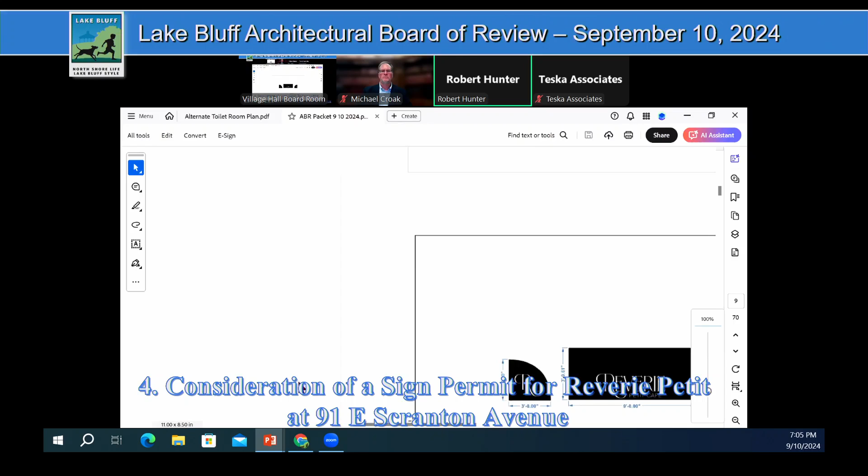There we go, there's our awning drawing. Art, do you want to kick it off? You know, I really had no comment. I just walked by and the existing awning appears to be removed. Yeah, they take it down and clean it, and then they wait for approval before the fabric gets applied to the existing frame. Exactly, correct. Yeah, I have no real comment whatsoever. I mean, it looks fine to me.

It complies with all of the requirements of the ordinance. Right. I agree, it looks fine to me. I think it looks great, and I like the chairs. Okay, good. I think it looks great. Bob Hunter, did you have any comments on the awning? I think it looks good.

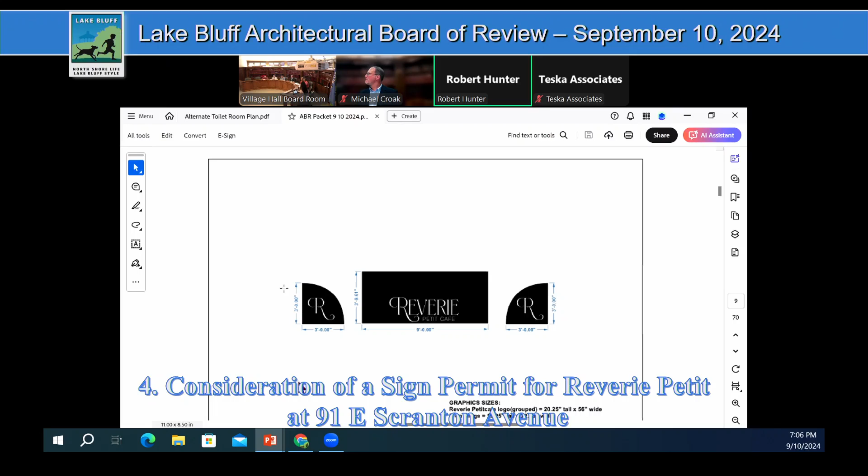Can you hear me? Do you want to ask us to make a motion? Yes, we heard you, thanks. Okay, can we have a motion then? I move the sign be approved as submitted. Second. Okay, Scott seconded, we'll do a roll call vote. Member Cottrell, aye. Member Dahlman, aye. Member Wicks, aye. Member Stratoff, aye. Member Hunter, aye. And Chair Deegan, aye. Okay, the motion passes, the sign's approved, the awning's approved. Thank you all. Thank you.

Okay, item number 5, moving on to design review for a sculpture and landscaping at the train station, 600 North Sheridan. So we have Jody Mariano from Teska with a landscape design, and...

Good evening, my name is Marietta Hans, and I'm the president of the Lake Bluff Garden Club. I'm here tonight to talk to you a little bit about the Garden Club, our history of giving to the village of Lake Bluff, and how excited the club is about the upcoming installation of Margot McMahon's dancer sculpture. The club was founded in 1917, so in May of the coming year the club will be 108 years old. That's one of the oldest garden clubs in Illinois, founded on the principles and dedicated to the advancement of gardening, environmental awareness, and civic beautification. All of these efforts and hard work come from a deep pride and love for Lake Bluff.

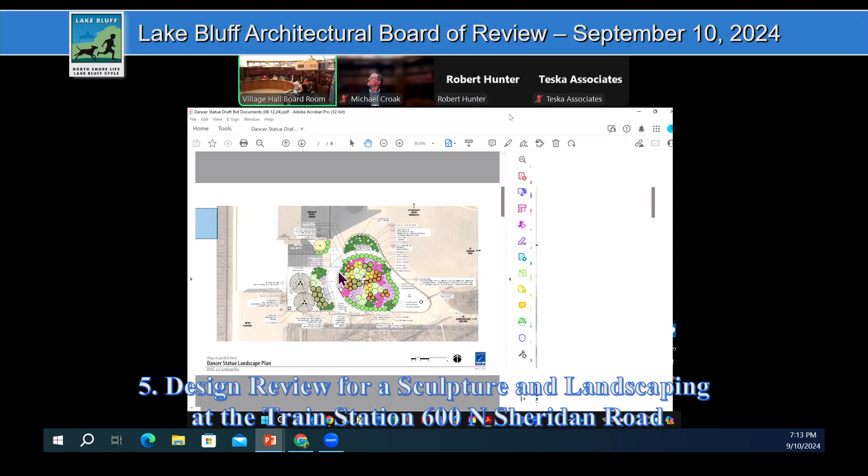Okay, so the site that we're talking about is the site in front of the Metra station. Just to orient you, here are the train tracks, here is the Metra station, the front door to the Metra is a little bit off of this page, but this is a large planting bed that sits just to the south side of the Metra station. It's got some existing light poles and bollards that would stay. There's a large-ish landscape bed in this area here.

There's a sidewalk that folks use to get from the Robert McClory bike path west to the train tracks, and also this is the driveway. From the driveway, you can get into the station, and you can also make your way to the platform through this way here. So this really is just a large green planting bed that kind of sits proud of the station area.

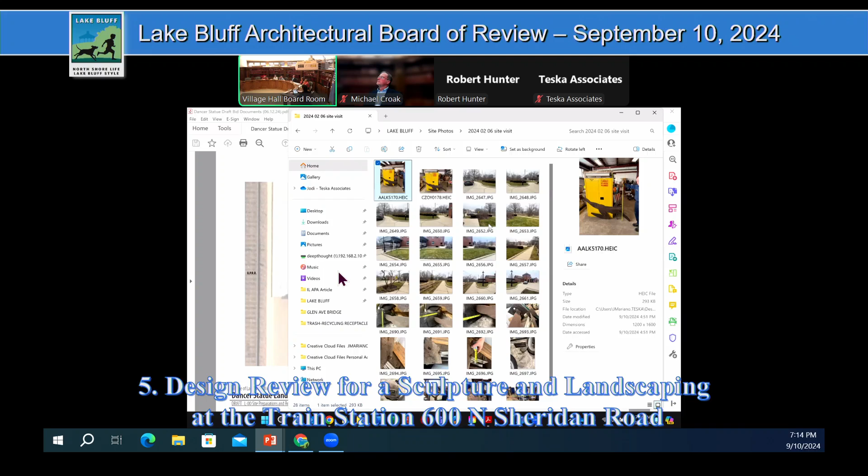So a couple of views, I'm sure everybody's familiar. We're talking about this area here to the right side of my car. There's a light bollard that would remain, and to the right is the tracks. The plantings in the middle are primarily hedged yews and other shrubs.

They're getting clipped regularly, and part of the sustainability mission of the landscapes we've been installing with the village is to use all straight species native plantings that don't require hedging or special treatment. So there isn't a plan to preserve these plantings, but to replace them with new ones. This little corner has some broken concrete that would be replaced.

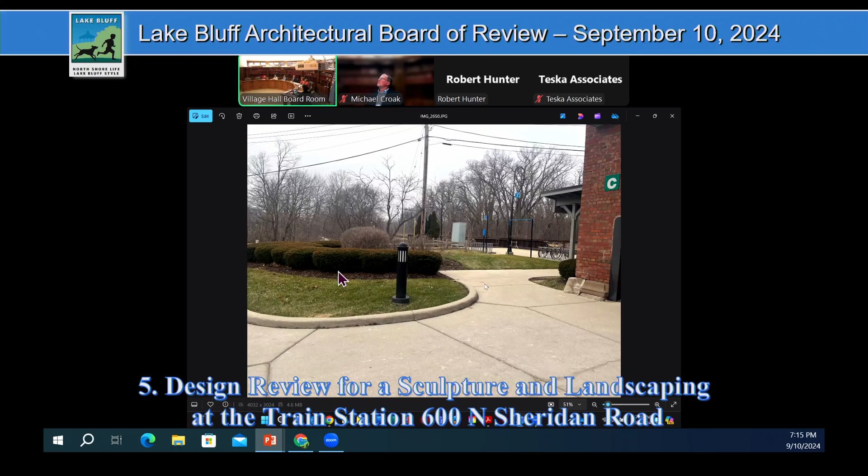Anyways, that gives you an overview. I think, to Marietta's point, the artist Margot was really interested in this site because you get views from all around. The sculpture warrants views from multiple angles, and it's also this gateway into the downtown from the train.

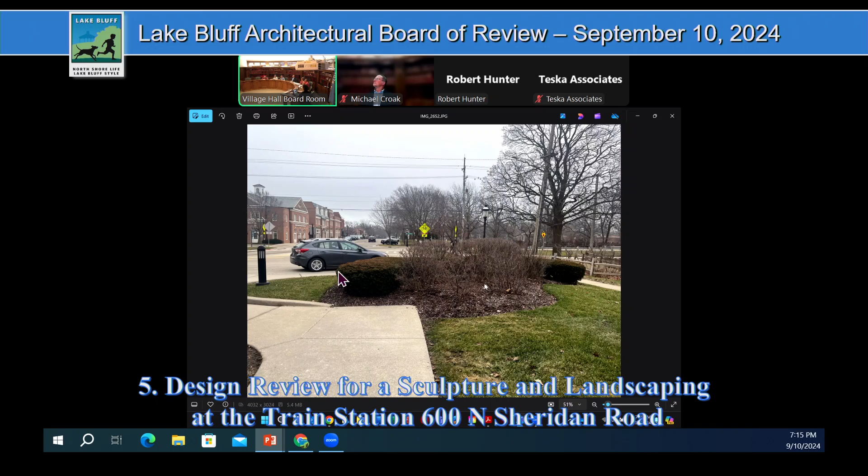So that's our site here. There is a concrete curb all the way around the planting bed. I'm going to show a plan that shows how we can provide some pathways through here and some seating areas. To accommodate that and make a good connection to the east-west pathway, there would be a cut in the curb that would be replaced with other pavement material.

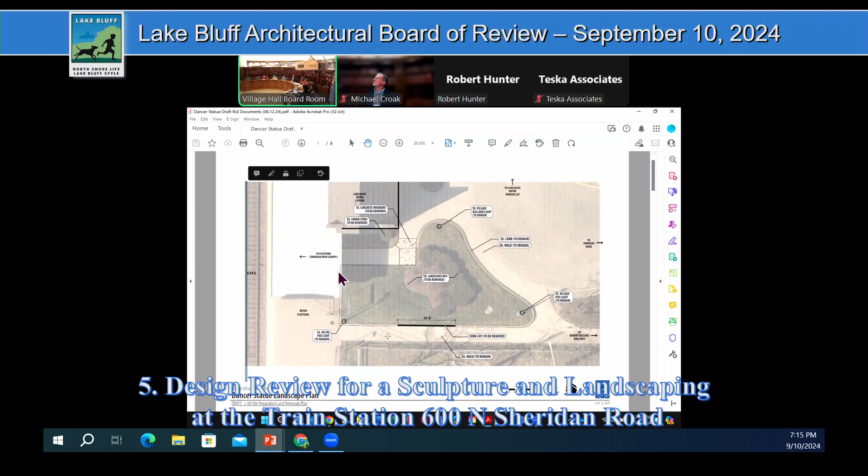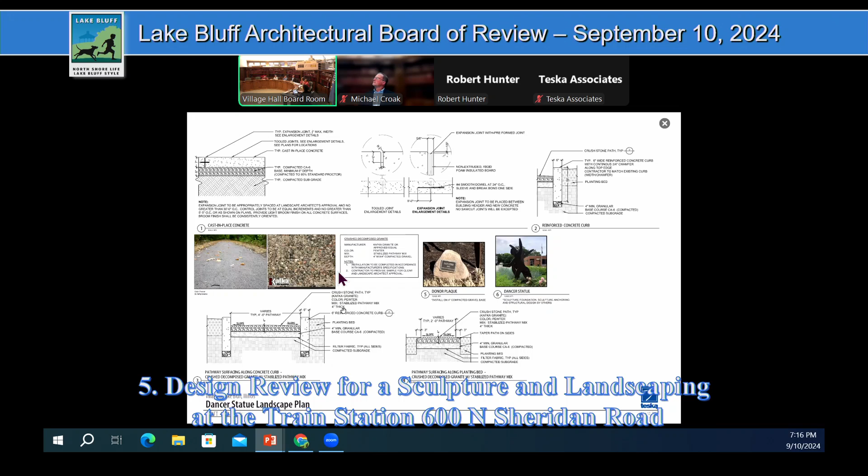I'll make this bigger, I don't know if that helps. The materials we are planning to use are materials that we've got elsewhere in the village.

So the sculpture, I'll highlight it here. It's made up of three Corten steel flat pieces representing a mother, a father, and a child — I think that was right.

They're all set on piers, with one anchor bolt that goes straight into a concrete foundation. There would be new foundations poured for this, but the intent is to position them similar to how they were positioned in front of the Inovasi corner, which is pictured here, with plantings around them so you can appreciate it from all angles.

There's also a donor plaque — all of these are stored in Public Works. We've been able to review and measure them, so this donor plaque would also accompany the statue in the new location.

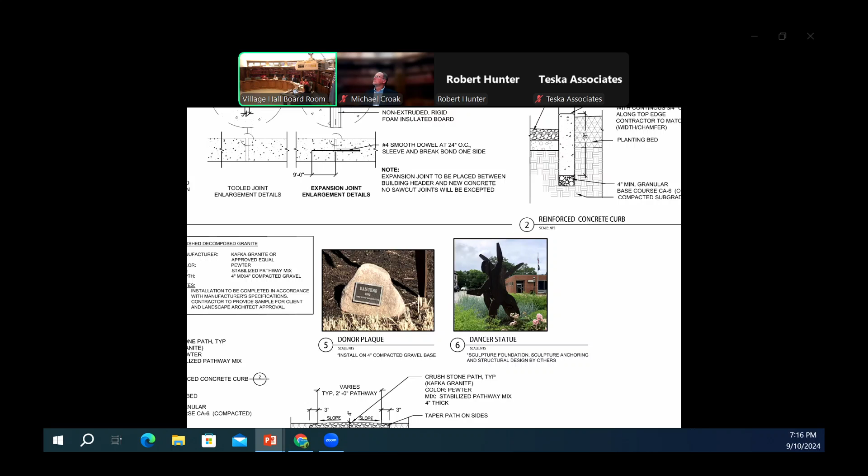The other materials we're talking about introducing are the decomposed granite pathway material you see here on the left. I happen to have a sample bag because Mike just gave it back to me — this is the same material used over at the Glen Avenue Bridge entry approach area. I've got photos of that too, but it's just a softer material that can be stabilized with a stabilizer to keep it in place. So that's the material we're looking at including.

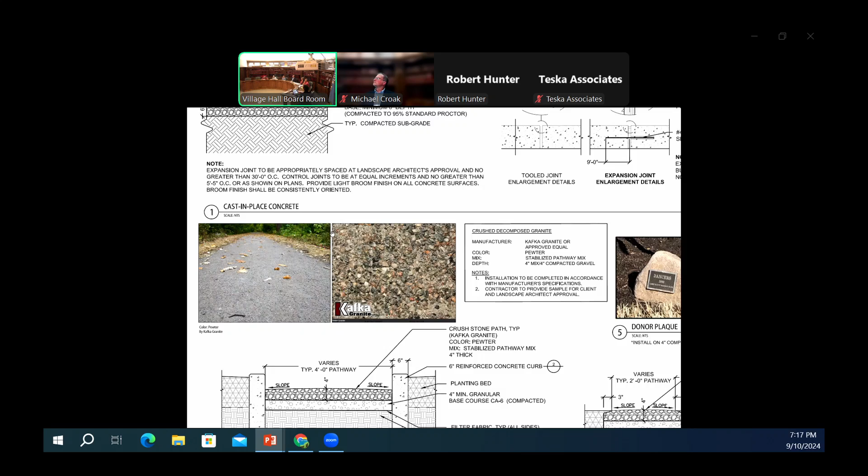And then the bench is the same product we've already installed at the Glen Avenue Bridge approach and also at the Sheridan Road bike area that we all worked together on some time ago.

The plantings we're looking at are all straight species native plantings, the same species we see in the downtown streetscape. We're trying to carry forward this palette we've been using downtown, but when we're just outside of downtown, we're breaking away a little bit to use more natural materials.

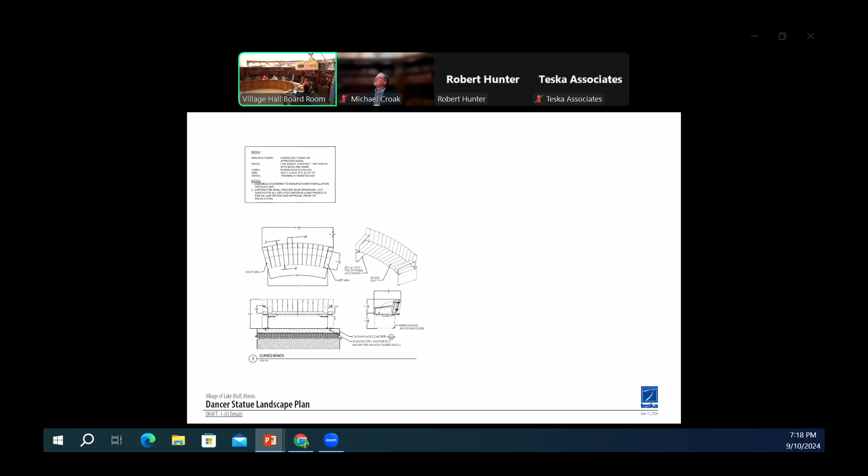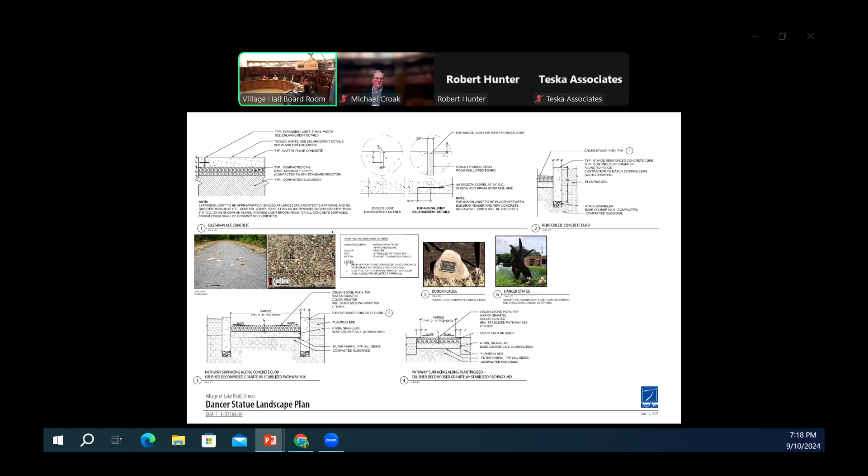For instance, the steel benches in downtown are those black steel benches, but outside of downtown we're starting to use benches with wood slats made of reclaimed ash tree, incorporating sustainable material. Likewise, the pavement material outside downtown can be decomposed granite — a little softer and more naturalistic, but not really appropriate in the heart of downtown. So the plant materials are ones we've got here downtown that we propose to use at the sculpture garden as well, plus some taller stuff like serviceberry and spice bush.

So with that, I'm going to take you through the plan.

Okay, so this is the site area again. Just to orient, we're looking at the same view. Here is our pathway from the bike path west to the station platform, and this is our Metra station up here. This is the same curb that wraps around the whole planting bed, so there's no change to the concrete curb, the sidewalk, or the driveway. We're really only talking about landscaping on the inside.

From a use standpoint, we're proposing a decomposed granite pathway that wraps around here, providing access that isn't there today. If somebody wanted a place to rest or wait for a friend or a train, it's just an alternative place to appreciate the art and have a great view of downtown.

The sculpture itself is proposed to be situated here in the center of the planting bed. These are the three panels that would be situated so you can appreciate it on all sides. The landscape bed would be slightly mounded up in the center, and the plantings I showed photos of would cascade downward from there.

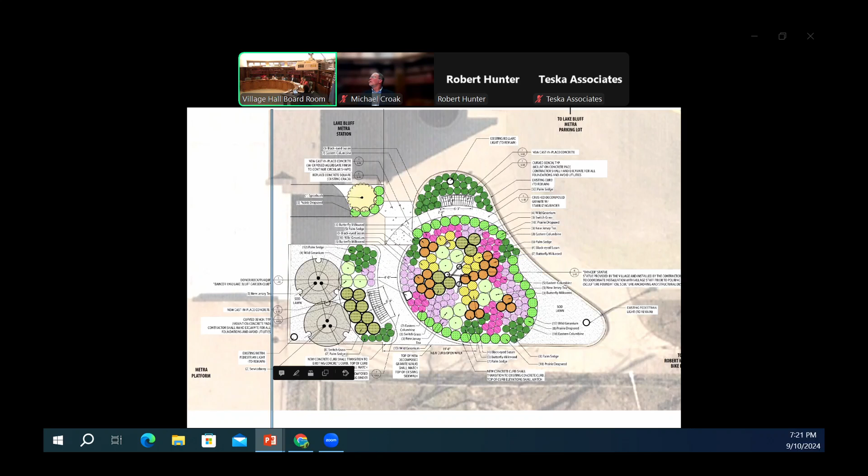Our plantings beyond the sculpture area include some plantings to provide buffering to the back of the bench here. We've got some shrubs, more of the sedges, and a couple of understory trees here, the serviceberry. There's a really tough area here for lawn to grow, so we're showing a spice bush and some prairie dropseed there as well. It's really focused inward, but we're incorporating plant materials beyond just to help frame that room.

Just like Marietta said, we've met three times. Each time, in true Lake Bluff style, it's gotten simpler and simpler. But I think we've gotten to a plan that the garden club and the artist are comfortable with. We're here to answer any questions or comments you may have, and I've got photos of other projects if you'd like to see other material photos.

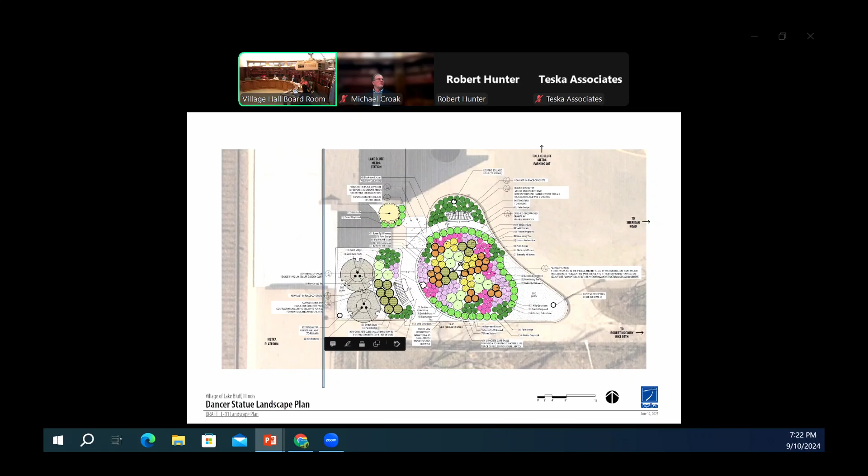Does that conclude your presentation? Yes. Great, why don't we start with some commentary? Art, you want to jump in? To me, it all looks fine.

One question I had is, it's a little unclear to me, the decomposed granite will be in front of both benches. Yes. And then there will be a little corner of exposed aggregate concrete? Oh yes, I should have talked about that.

When I pointed out in the existing photo that the concrete's cracked in this area, we want to replace it in kind. Today there's this curb that follows around here and comes across, so just the concrete here would be replaced because it needs to be. But inside, that way you have a solid, accessible concrete walk that takes you from the Metra station all the way to the platform, just like it does today, but with concrete in better condition. And then we're proposing a score joint to continue this curved shape.

Outside of this area where the concrete is to be replaced would be a 4-foot wide decomposed granite walk, and on this side, a 2-foot wide decomposed granite walk. This walk doesn't really get you anywhere - it's not an accessible route, just an access point to the bench. But this walk here would be accessible and would get you to the bike path. The curbs here would hold the plantings in because we have a bit of grade change to contend with. Does that answer your question?

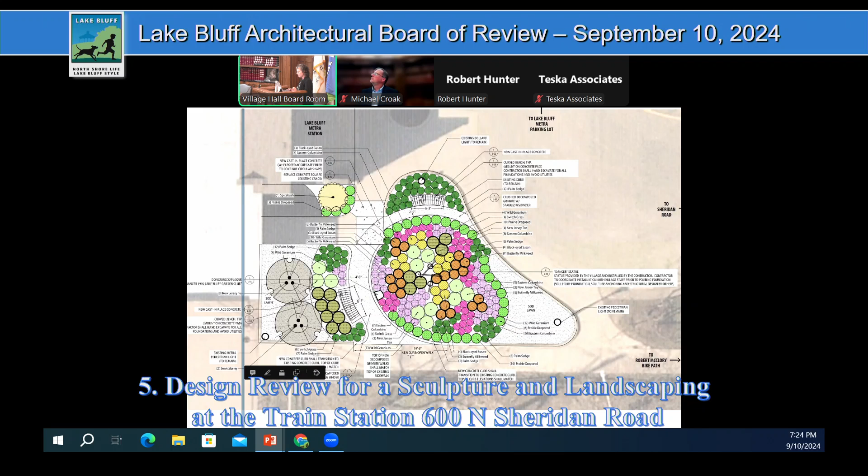I guess one question is, since you're removing the concrete, why would you replace it with concrete rather than decomposed granite? Oh sure - we want to make sure this is a truly ADA compliant, accessible path as it is today. The decomposed granite can be accessible, but it requires more maintenance to do so, so that stabilizer comes into play. But we know this is a tough area with all the plowing and de-icing salts, so we wanted to be very conservative here.

That's really the only question I had that was kind of unclear to me.

Okay, Neil? I like what you're doing. I guess one question I might have regarding the benches. I like these benches, we're using them elsewhere, they're good looking. I do worry about the maintenance of them over time. Is there any kind of a plan for what happens in 2, 3, 4, or 5 years when the wood starts to deteriorate and needs attention?

But this is very durable because it's been thermally treated. If there was anything that needed to be addressed, for instance, if somebody really tried hard to carve into it, it could be sanded away. It's thick enough to handle that sort of thing. It's tough to break the wood. It's distressed and thermally treated so that it's durable enough to handle all of this.

And we've worked with this material on other projects that have been in place for 5+ years, and they've held up well. If a slat has to be replaced, it just bolts right to the frame, so the old slat could be unbolted and a new one bolted back. Some communities will purchase attic stock, so they'll have slats in the shop if needed, but I don't think we did that here. So there are ways to deal with the maintenance, but really it's not any different from other benches you'd find outside.

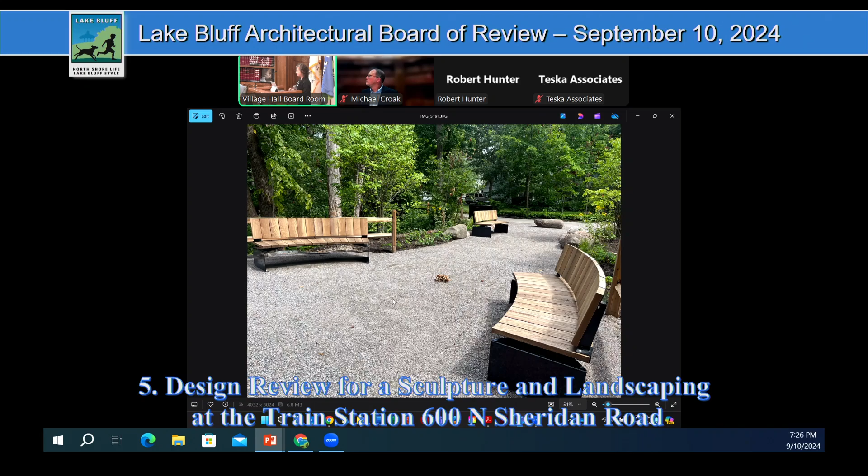That's good, thank you, I'm glad there's a plan for it. Other than that, I'm very comfortable with what you're doing. Look forward to seeing the sculpture back. Thank you, yeah, me too. It's sad in the shop, it needs to be out.

That was my question as well. I feel like you answered that well. I really like the way you guys are incorporating more native plants like that, I think that's really great. And I like the way it ties in with everything else that's going on. I think it's gonna be really pretty. Thank you.

Scott? Yeah, I like it as well. Is there any lighting planned? If we have existing lighting on the site, I'll point it out again. We've got a pole-mounted light right here, a standard pedestrian level pole light. We've got a bollard light here, another bollard, and a pedestrian pole light here. But to answer your question, no, there is no plan for additional lighting. We did have to be mindful of budget, so the intent is not to run new utility or do any major foundation work other than the foundations associated with the sculpture and the benches.

Okay. It would be pretty to light the sculpture, but that's not in the budget, I'm guessing. It's not currently in the budget, but if we were to light the sculpture, we'd just have to pull electrical from someplace and make sure the existing loads can handle it, which it probably could. It's a low voltage type of thing, but it's a good comment and it's something we can certainly look into.

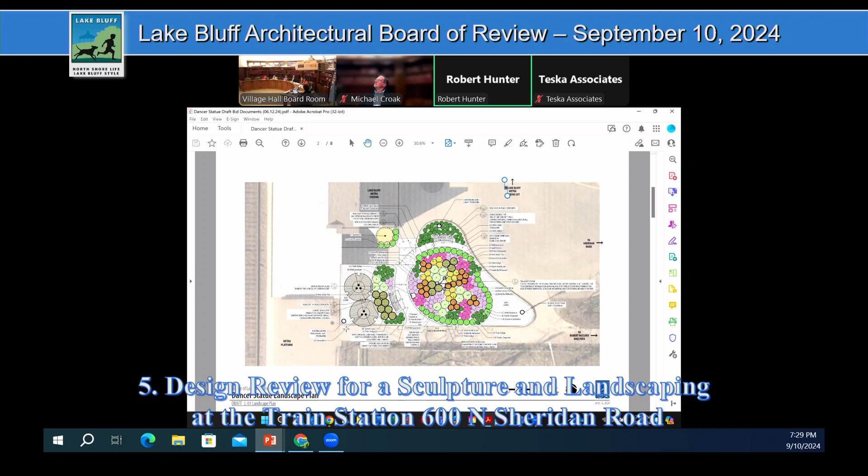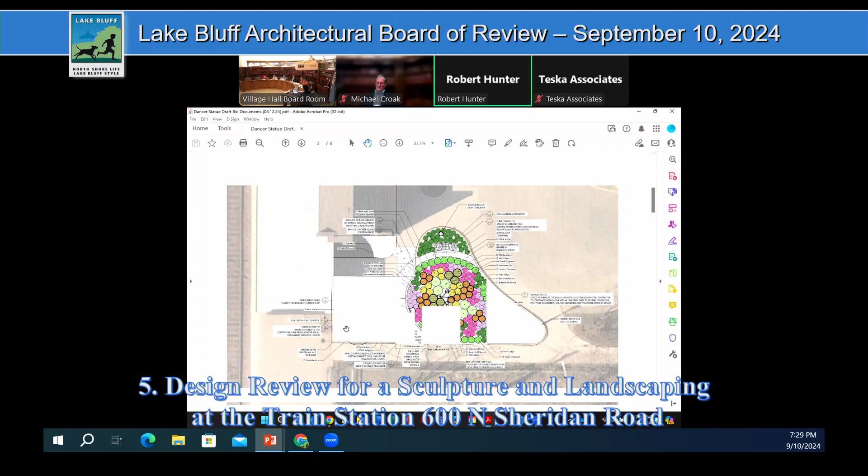You didn't even see him at all. Looking at your plant material, I see you've got the switchgrass right next to the sculpture, and that gets 3 to 5 feet tall. Some of the other stuff is 2 to 3 feet tall. I'm just wondering if we're going to start to obliterate the sculpture once again. Otherwise, I think the plan is great. Yeah, thank you, no, you have a really good eye.

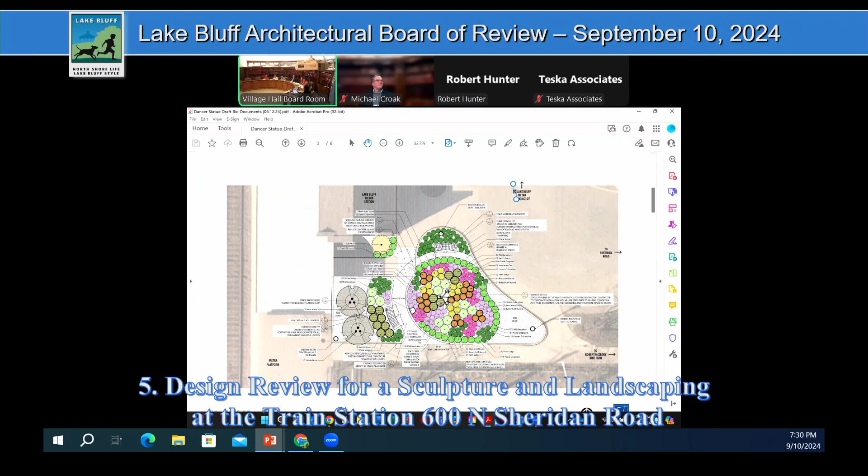We do have switchgrass, and it's this kind of khaki color. There's 1, 2, 3 here and 1, 2, 3 here, but your point is really well taken. We don't want to obliterate the sculpture. So maybe we just keep the switchgrass to here behind the bench, and the rest of the plant material, like you said Bob, is 3 feet or less. So happy to make that change. That would help, I think. Yeah, no, that's a good one. Thank you.

Other than that, that's my only comment. Great, thank you, we'd be glad to have it back.

Do you want to ask if someone wants to make a motion to approve with that change? Anyone want to make a motion to approve? Yeah, I'll move that the design be approved with the change, changing the switchgrass to a lower, shorter plant. Can I make a clarification? The switchgrass around the sculpture, the 6 switchgrass, to be replaced, but I think we would still hang on to the 8 switchgrass behind the bench, if that's acceptable. Yes, yeah, I understand that. No worries. Second.

Okay, we have a motion and a second. I'll do a roll call vote. Member Stradiff, aye. Member Wicks, aye. Chair Deegan, aye. Member Dolman, Member Cottrell, aye, and Member Hunter, aye. Okay, motion passes, all approved. Thank you very much. Thank you. Thank you.

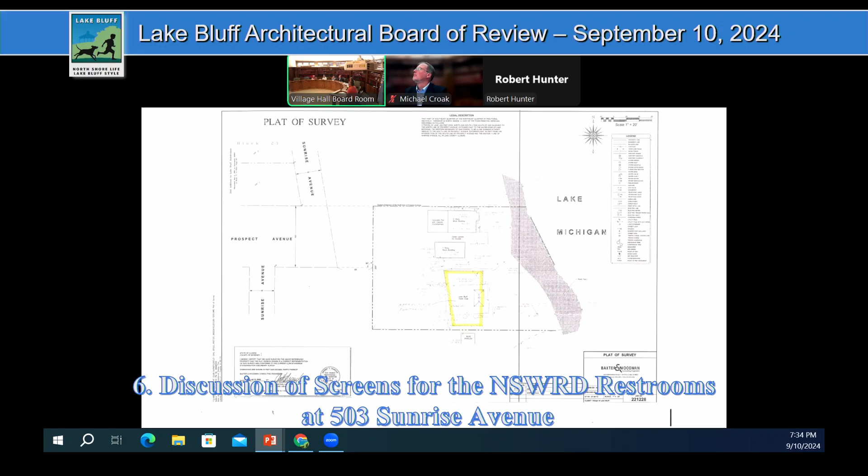Next slide. This is the overall plat of survey showing the general footprint and location of the facility. Next slide.

This is the proposed site layout. As you can see in this diagram, there were a number of obstacles to contend with when exploring options for the design layout of the new club.

Maintaining specified distances from the multiple service access points of the water tank below. Additionally, there was a very strong emphasis on minimizing the encroachment of the beachfront area with the proposed design.

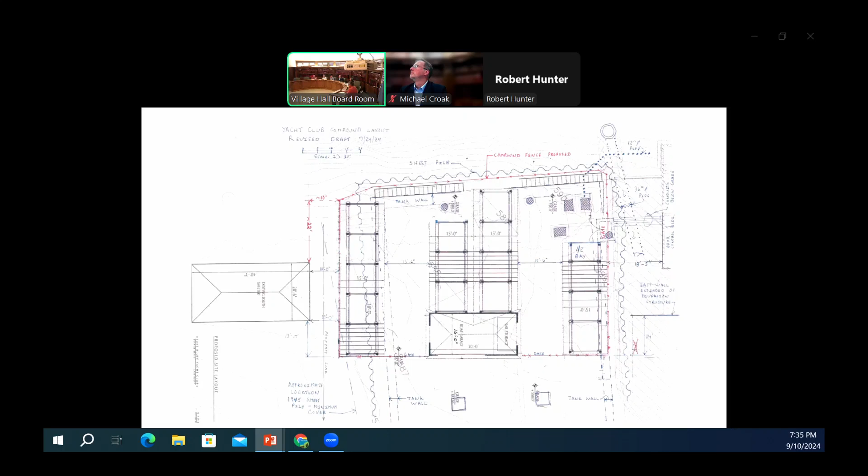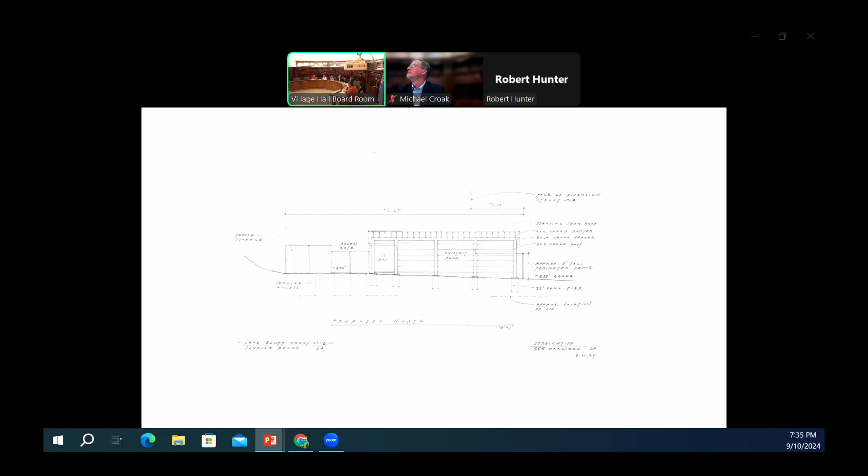This is the east elevation showing the central storage shelter facing the beach and the adjacent entry gates and boat storage systems. This is the north elevation showing the racking systems as well as how we are accommodating the natural grade elevation changes of the beachfront.

This is a section detail of the boat storage and racking system. We are proposing a cedar timber structure consisting of 8x8 posts, 8x10 headers, 2x6 roof rafters with pre-cut rafter tails, and we are proposing a metal ribbed roof over the sailboat storage.

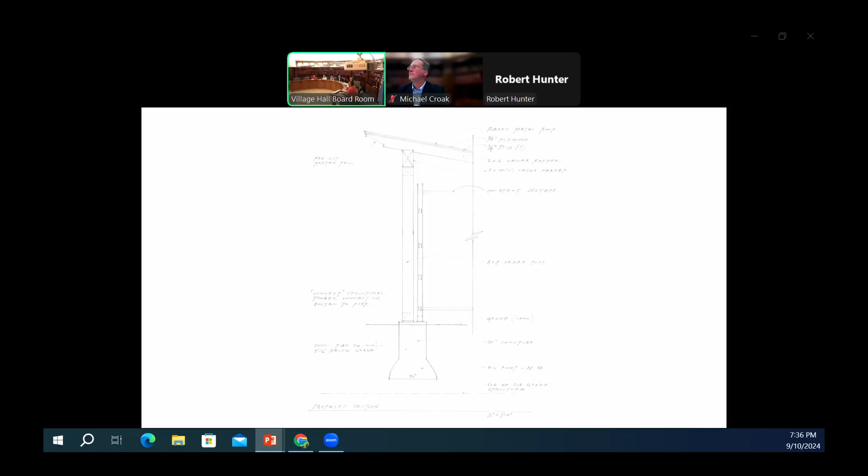The purpose of this meeting tonight is to hear your feedback on the conceptual design presented, and then perhaps have a deeper discussion regarding the continuity of materials, colors, and textures on all of the buildings along the beachfront.

These are, number one, the building color. The Yacht Club's goal is to remain consistent with the other buildings. It is our understanding that the NSWRD is proposing a creamy white or creamy color with the renovations that they're proposing. So we will stay consistent with or complementary to this, and then we pose the question: should the south shelter also follow suit to create an overall continuity in the composition of all these buildings?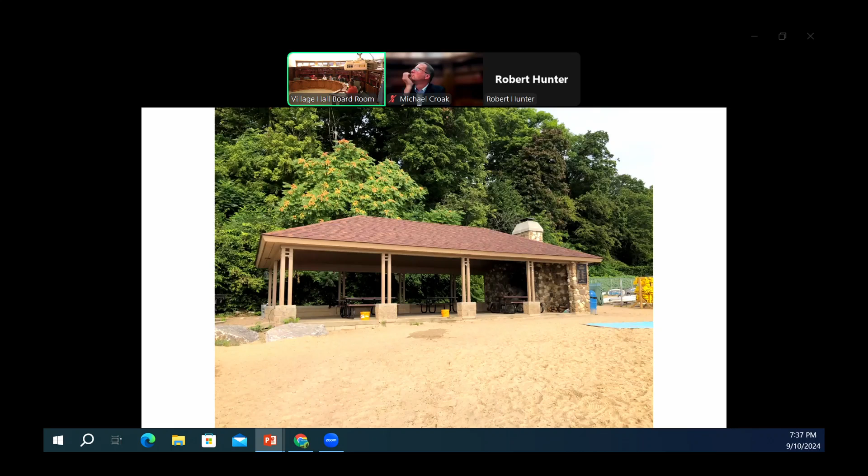Next slide. So for the roofing material, the south shelter has an architectural grade asphalt shingle in a terracotta color. The Yacht Club is proposing to match this shingle on their shelter as well.

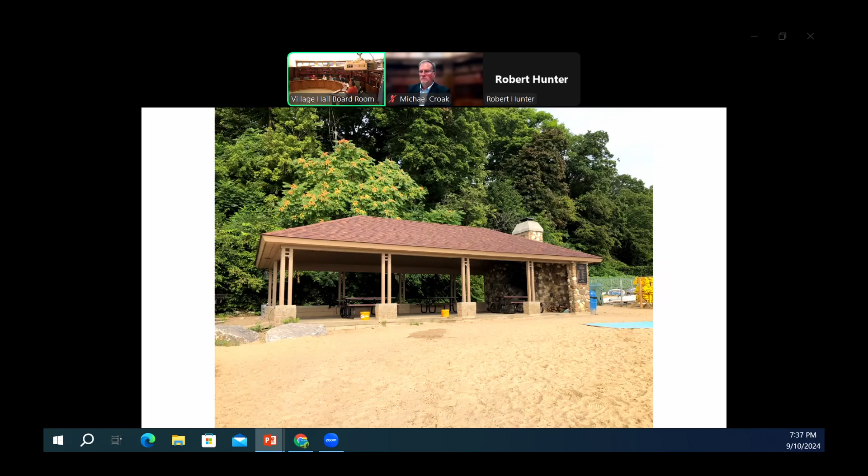On the next slide, you will see a soffit and fascia detail on the south shelter, and we were planning on matching this detail as well.

So budgets are in play here, and we might consider a mix of these two types of fences around the perimeter, with the nicer fence being in front and then stepping it down as we move around to the back of the facility.

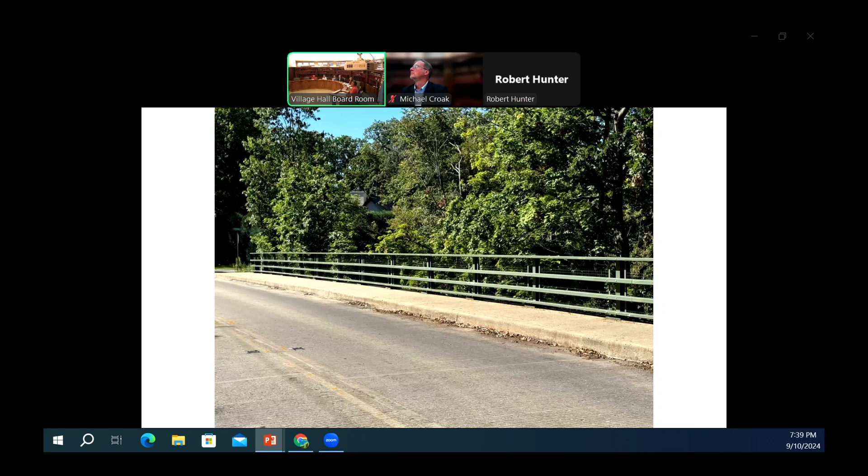Finally, I'll show you a couple slides of some of the bridges in town and the footbridge that was recently constructed. These colors are a greenish, nice green color, which perhaps we'd want to introduce down there as well.

So with that, I hope the board has a clear understanding of the intent for the project, and I will now open it up for discussion. Thank you for your consideration.

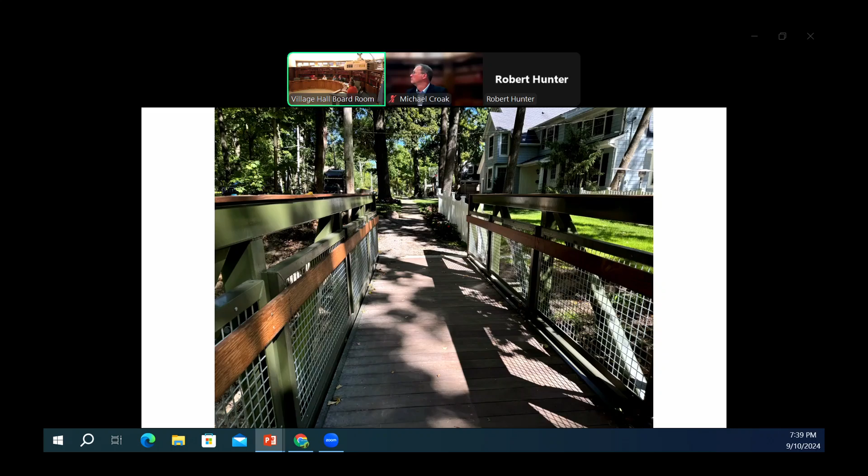Susan, you want to start us? No pressure.

I just have to say, this seems like such a challenging project to incorporate all these requirements and buildings, and I think you guys have come up with a nice solution, and I know the budget is not exactly large either.

I guess when I went down there, my comments were, I was wondering about the little building here that you've shown, and you sort of answered my question by saying that you're gonna match the details and probably the pitch of the roof and all of that.

What are the things that look like doors, or they almost look like windows? Are those garage doors? Yeah, that's just a suggested design for the garage door to kind of mimic a carriage-style door.

And then what's the material that the building is primarily made of? It's likely going to be a horizontal lap siding, wood lap siding, or a ship lap. Okay.

And that's wood? Or would it be painted wood? Or is it like a composite?

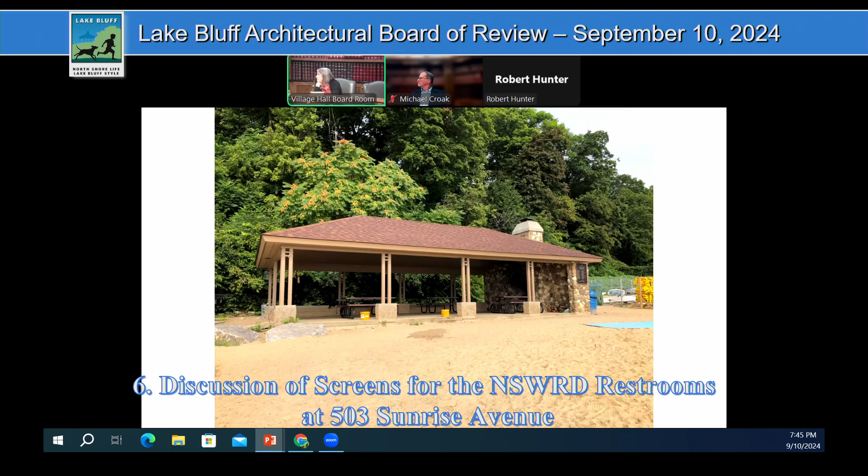What color do you expect the fence would be? I think it's probably either going to be a kind of dark bronze, which is what I believe the NSWRD is proposing, or potentially that greenish color that was shown on the bridges, which I think really blends well with the green background. You can kind of see the bridge fence with the green background in one of those photos. It really looks nice and blends well.

This product is available in three different materials, right? Aluminum, composite, or vinyl. Do you know which one you guys are going to use? I don't, and I think it's really going to come down to value engineering associated around that perimeter fence.

A concern I have with the fence is it's 100% visual blockage. I get the feeling that people, when they're on the beach, it might be fun to look in there and see what boats are behind there. But if there's a security reason that it has to be 100% blocked, well that's a different story.

Yeah, I don't know if you guys want to, you probably have more experience than I do. We heard both sides, we hear people who think it's fun to look, yeah, I think because it's being recorded...

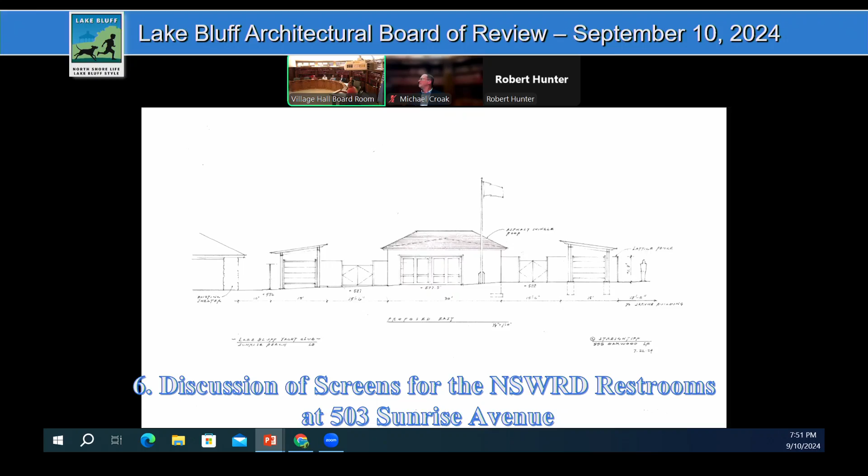Hi, I'm George Russell, 448 Gurney Avenue. Bob, I hope you can hear me. To prepare for this meeting tonight, I reviewed the tape of the meeting back in March when you last had the North Shore facility on your docket, and towards the end of the meeting, Bob made the comment that engineers don't know anything about this kind of stuff, so they really shouldn't be commenting on this. So I made it a particular point to make sure and come tonight and comment anyway.

35-year resident of the village, I hope, and I love the beach. It's one of the greatest aspects, if not the best aspect of the town. The yacht club has really worked very hard trying to pull this together. One feature that wasn't mentioned about the layout is that as now proposed, the east line of the compound will be approximately 14 feet back from where the old compound was, which creates a lot of nice usable beach area. So very much in favor of that.

My good friend Dan Caldwell, 2 years ago when this started, commented about the earth tones down at the beach. And I think it would be very important to try and blend the outside perimeter fencing with the shelter that's there, the rock, get those kind of colors. I heard the word dark bronze for the fence. I hope it's not, I think that would pop. I don't think we want the fence, this facility, to really pop, in my opinion. But I'm an engineer, so I probably don't know.

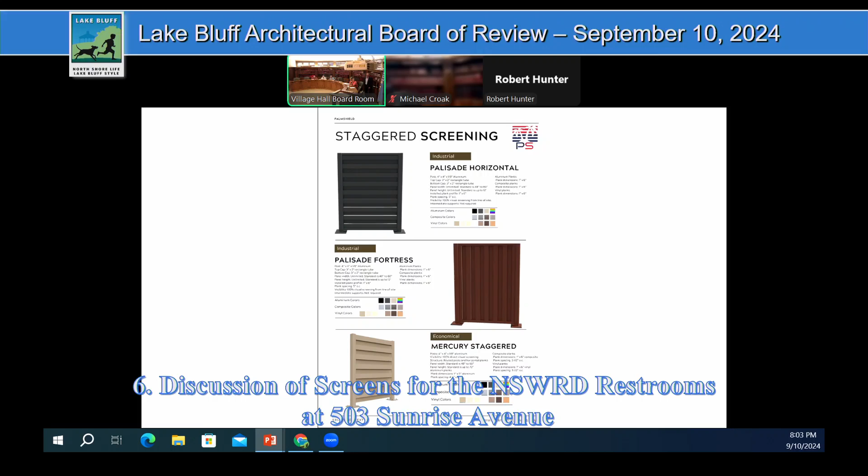So if you do aluminum, the light beige is an available option there. And even though the yacht club might not have the money for aluminum everywhere, I think the sanitary district is looking for a durable material, and they have only a very short distance of screening that they need to install. And I gotta go grab a power cord for my laptop before it dies. There it goes.

So go ahead and discuss. What do you guys think of the screening for the restroom doors?

Art? Well, it's not real clear to me exactly which of these. I've seen the plan, and I'm perfectly okay with the plan. I'm just not sure what screening they're talking about. I think it's this one. But it's this right here. Yeah. Like you said, it's not much of it, it's just those L's right there. Right, yeah, I think it's just those L's. Okay.

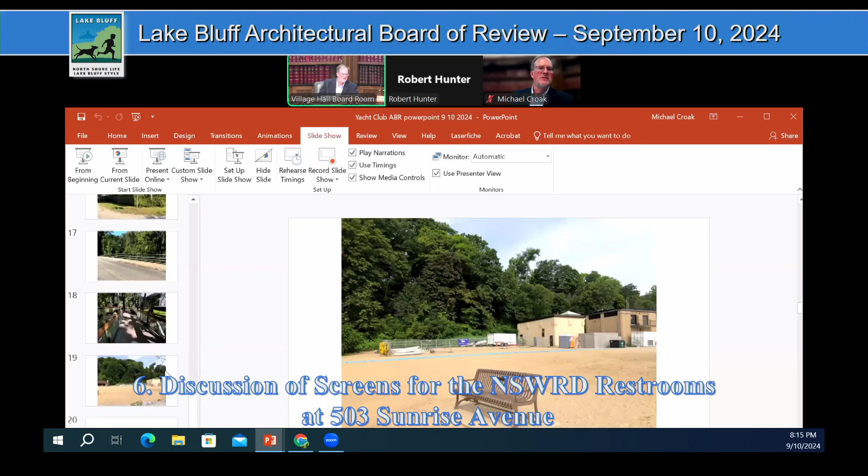We could go down and look at pictures again. Did they already, is that like the final coat of paint that they've already done? No, I don't think they painted it yet.

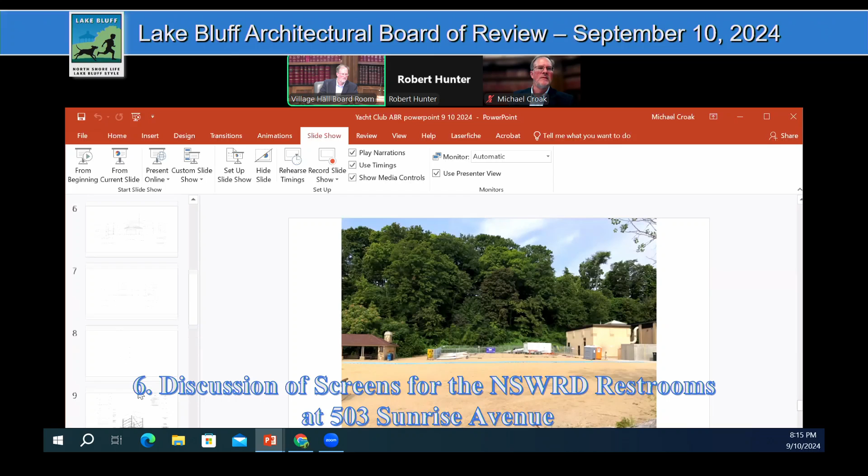The outside structures are kind of a little more muted. They sort of blend with the sand a little bit. I mean, to your point, when you try to match something to a brick, you're right, it doesn't always match, but I feel like we could get a better color than that.

I agree with that. Like something that's tonally, maybe not exactly the brick color, but a tone of it, that looks just so kind of yellowy and harsh, or not soft.

You know what they were saying? If I'm trying to match the color, I'd like to see them buy some of the paint and put up an 8-foot by 8-foot section of it, some swatches. I like that idea.

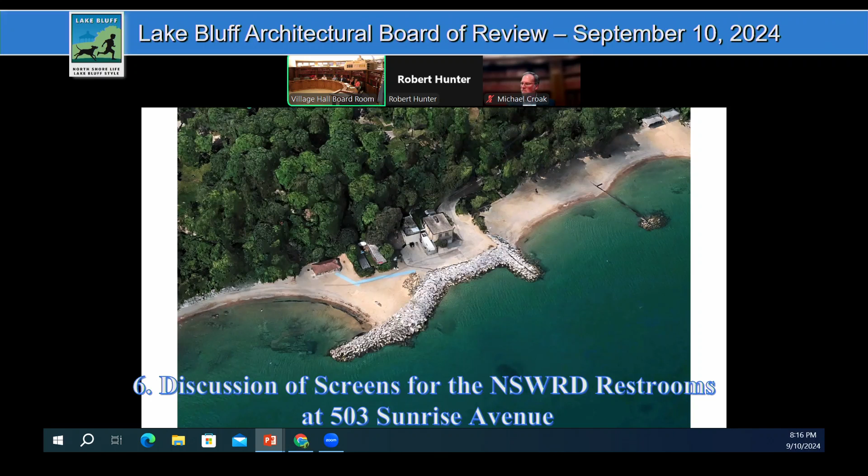I think, because that's a very big building with not a lot of detail, that paint color is gonna be noticeable. And then your beautiful design is gonna have to be matching that too.

Does it though? No, it doesn't, but how about in that range? Well, wait, what is the shelter? Shelter is also kind of a sandy brown, kind of like the color of the sand, really. Pretty close.

I saw his elevation rendering and I'm going, you know, cedar, weathered shake, and the yard arm out in front, and just make it, why does it have to match those buildings? Those buildings are awful, sorry, I'm just, just go the other way. Really turn left and go. That's my opinion, I would just go the other way.

Let me throw a wild one out there, if you can hear me. You could go sort of the cubist route and paint that yellow thing like dark brown, and really don't even try and match it, just go a different direction, and maybe it's the color of the roof over on the shelter or something like that. And quit messing around trying to make it look like something it's not.

Which structure are you talking about? I'm talking about the odor control. Well, whatever it is, the yellow thing. Yeah, the odor control building in back. Odor building, right. And then would you leave the restroom and the diversion structure in front to be yellow?

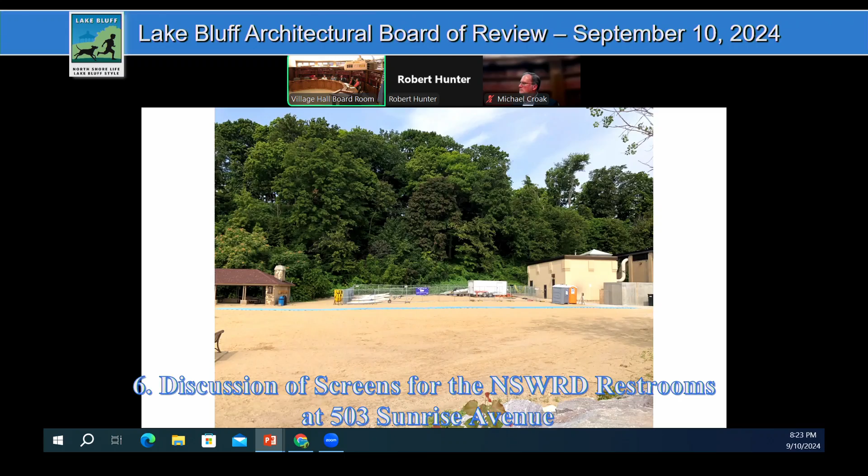Well, the brick itself, Scott, is kind of like a sand color, the brick on the other building is almost like a sand color. Yeah, I agree, so if that building in the back was like a sand color it would kind of disappear. Well, the bathroom in the yacht club is going to cover up a certain amount of that. Yeah, that's true. I remember that being impossible to match. Yeah, once the yacht club's there it'll cover up a lot of it.

I think we probably want to continue this till next month, so we don't have to mail notices out to everybody as we do when we start over again. So would someone like to make a motion to continue it to our October meeting?

Bring a picture of your house. So moved. I think it's almost the same as our house. In a second? I'll second, let me second it. I never get to second anything. Okay, alright, Mr. Hunter.

Okay, I'll do a roll call vote. Member Stradiff, here, to continue the restrooms to next month's meeting. Aye. Member Wicks, aye. Member Cottrell, aye. Member Dahlman, aye. Chair Deegan, aye. And Member Hunter, aye. Okay, all aye, it's continued.

Okay, almost done. You done yet? No.

Two relatively quick items. For the next two items, they're village items: Village Hall and the generator and trash enclosure at the Public Safety Building. We've hired Dave Mishka of Architectural Consulting Group to do some design work for us. First he'll talk about Village Hall, where we want to replace some windows and doors for several reasons — we've got some rotting wood and a lack of energy efficiency. You've probably all noticed the front stairwell is either hot or cold every time you walk up there, with the single pane glass and all that. So I'll put our packet up on the screen, and Dave, you can go ahead.

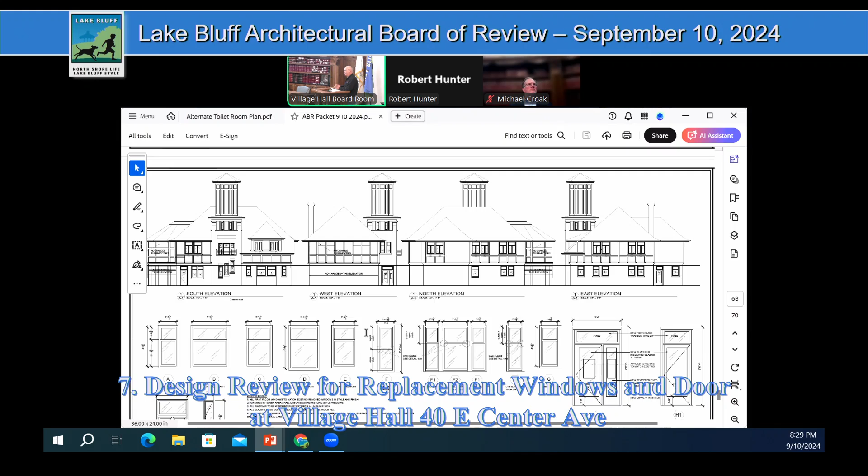It's pretty much from the tower and then working east along the building to before where the addition really starts. So we came up with a drawing to show what we've found. In the tower area, there's six or seven, eight windows that are historic in nature.

Mike, if you could scroll up a little bit—so we can see the bottom of the drawing. Oh, okay, yeah, there you go.

In the lower left corner, there are a number of windows, 6 or 7, 8 windows, that have what we call a sash leg to it—a sash profile. So what we want to do is keep that profile because it's consistent with the historic nature of the windows that are here.

We're also looking at keeping the window frames in the same narrow sight line that they are, the dimension, to again follow the historic nature of the building.

The trim that goes around on the outside has been caulked over, painted over numerous times—I don't know over how many years—and you can see the buildup of either the deterioration or the paint over the caulking that was tried to apply.

Second floor windows in particular showed a lot of caulk issues. So I don't know to the extent of how much that caulk up here has pulled apart from the window frames itself.

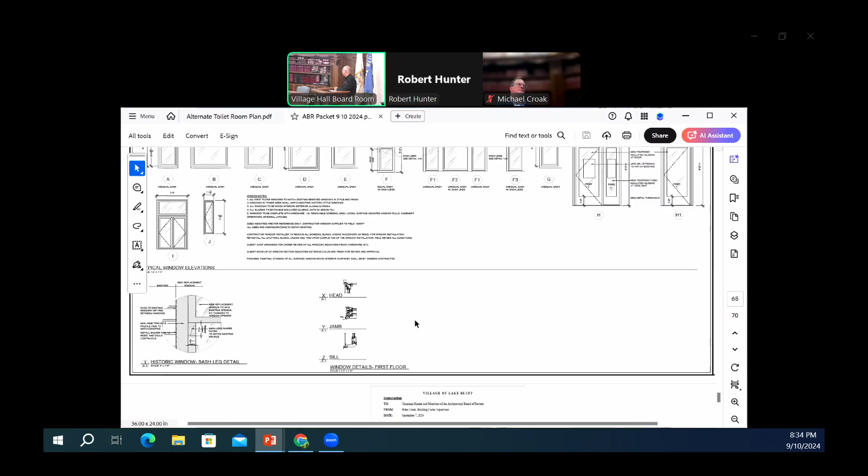And just real quick, what we're also intending on doing as part of our work, once we move on to the next step, is to create a spec series and bid form so we can get bids for all of this work from the contractors. The other part of this, real quick, is the front door itself.

We'd recommend work on that because there's quite a bit of wear on the threshold itself. If you look down there you see a carved out area, I think from the wear and tear of people entering. Plus the threshold on the bottom of the door is a little higher than what we'd want in regard to ADA requirements.

So what we'd recommend to do is pull that door, replace it, replace the transom, the high window, and the side light itself, maintaining all the heights of the rails and stiles, and just put a lower clearance threshold on the ground so we can meet ADA.

We're still looking at possibilities, and I'm still in discussions. The front door right now is starting to sag, and you can see when you look at it, it goes from the hinge side, and the gap at the top gets larger and larger. That's going to affect, obviously, the pull that we have to meet for ADA.

So there we're looking at either an insulated aluminum frame to maintain rigidity, and then particularly using the aluminum panning trim so it softens the look and takes into account the historical nature of the building itself. It's just not going to be this square, modern frame.

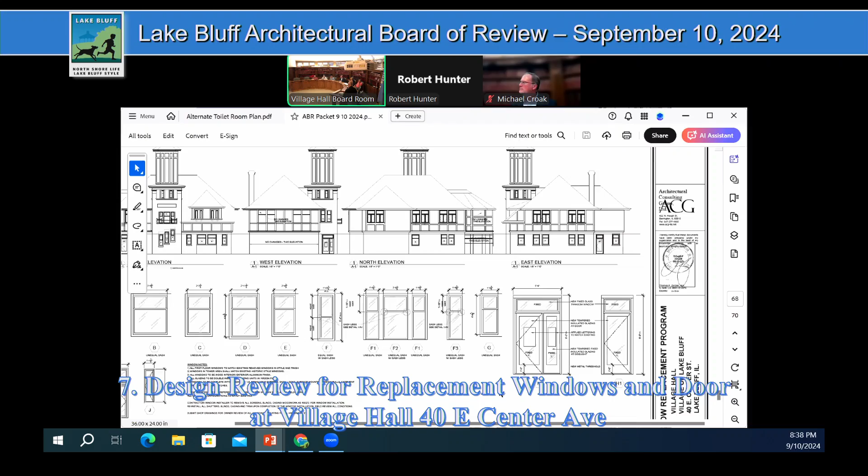So if I understand, when the job is complete, all of the windows that you've changed, some windows will remain, but all of the ones you've changed will be aluminum on the exterior. Correct, and the trim around them will be aluminum. Just around the window, yes. All the windows, if memory serves right, they're all, especially on the first floor, inset into the brick itself. So the window insert or replacement would go in, and then the trim would be applied onto the outside within the existing masonry opening, which is what it is right now.

The second floor windows, the casement windows, are obviously in stucco with trim work. Do you make recommendations on how to flash that? Because I know sometimes when you're doing restoration work, you're compromising when you're flashing something. Yes, and that was a concern in regard to, in particular, the second floor windows. The second floor windows have, on the sill portion, a large sloped detail to it, and those are showing significant deterioration.

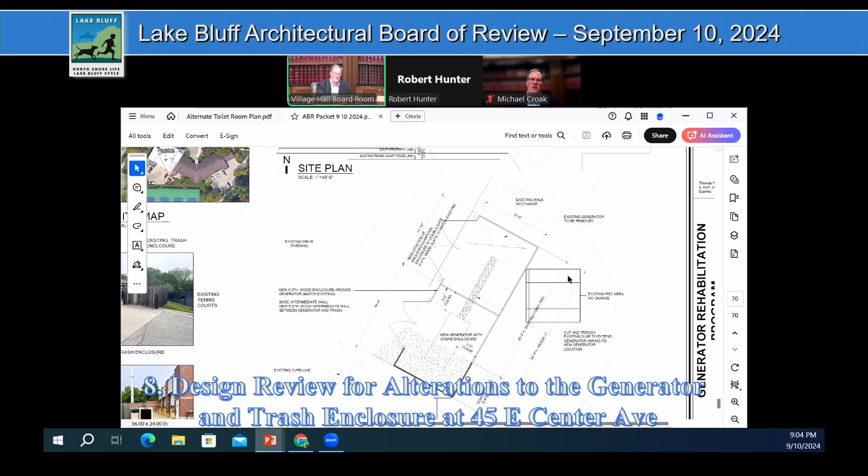And if we use the existing generator, we could put sound attenuating panels on the inside of the fence. If we do a new generator, we could buy a quiet one. With that, I guess what else do you have to add, Dave?

Not a lot. The existing generator, when we reviewed it, doesn't have any sound attenuating items itself. There's no sound enclosure, it's just a sheet metal enclosure with all the openings in it for ventilation. So any sound that does come out and generate out of the generator is just going in all directions, and it just happens to be open right to the fire station building itself.

So like Mike was saying, the generators right now, for my research, their general lifespan is about 25 years, so we're coming up to that. It's about almost 20 years here.

So by moving the generator away from the location that it is now, almost flipping the generator and the trash enclosure, what we'd be doing is getting that sound source away from the fire station, making the enclosure and the pad larger so that we can now provide the proper clearances for the service and for the proper airflow.